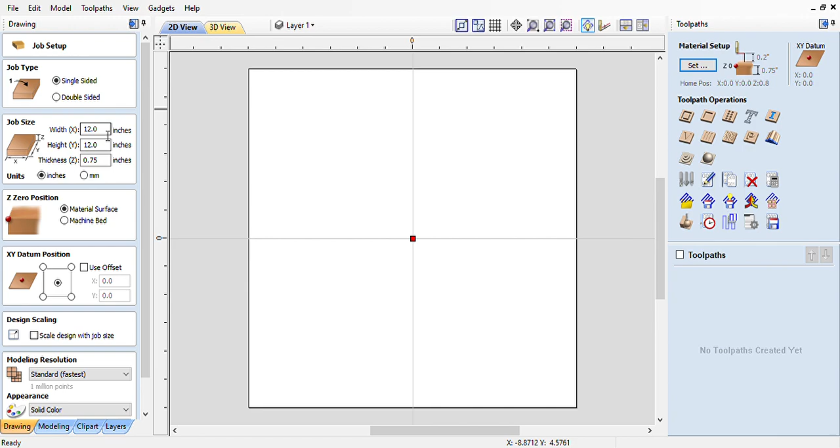The first thing is setting up the size of the clock. I'm going to use a 12-inch diameter clock, but it's up to you how big you want to make it. I probably wouldn't make it smaller, but you can make it bigger if you want. So I have to make it 12 by 12 to get that 12-inch diameter. Make sure the origin is the middle and hit OK.

The hardest part of this in your mind should be, how am I going to make sure all the numbers are evenly spaced? It's basically impossible to do that by hand, so we're going to use some features of VCarve.

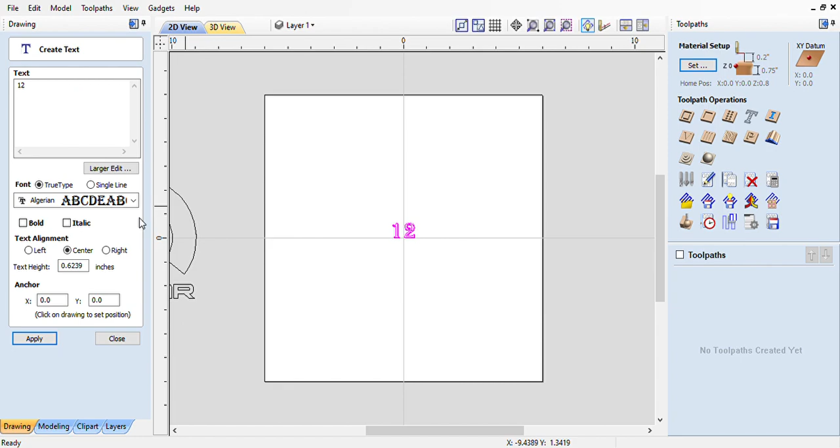First, we have to make our first initial number, which is going to be the 12. So I put in the 12, and you can pick out what type of font you want. I don't really care, so I'm just going to make my 12. You want to set this to whatever size you want. Again, I'm going to leave it because it's a sample. I'm not too attached to it.

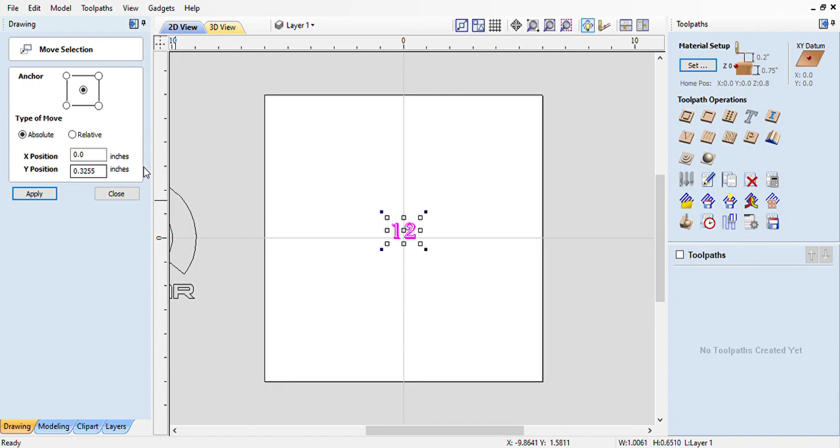It's really important that the 12 is exactly centered. A little trick to do that is click the Move tool, make sure it's in absolute and that your middle is selected, and I hit my X as 0. This is going to make it perfectly centered. If I wanted it perfectly centered in the middle, I would make Y 0 also, but I want this to obviously be up top, so I'm going to move it somewhere up top to where I like it. I like it here for now.

Now I'm going to start doing my layout for the numbers. To do that, I use the circular copy tool. I click that, make sure this is in purple, so it's selected. I have to set my rotation center. I want my rotation center to be the middle of the clock because the origin is the middle, so my rotation center would be 0, 0. If your origin was the top left-hand corner or something like that, you'd have to change this. That's why we make ours the middle - it makes it easy for a lot of stuff.

The rotate copies would actually, if you look over here, make each number slanted so they all look towards the middle. I think that looks good for some clock designs, especially the Roman numerals, but I don't really like it for the plain numbers. If you want to turn that on, you can, but I'm going to leave it off because I don't care for that. Obviously, we need 12 numbers, so I keep that 12, and it's going to be a complete circle, so I keep that 360.

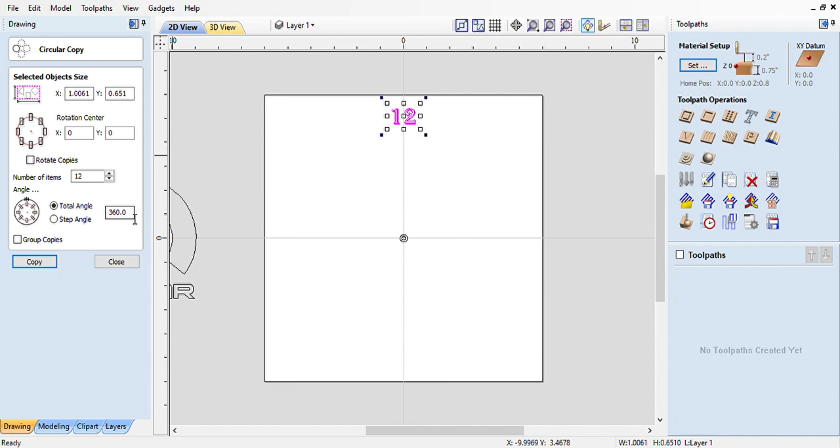Now I have all my different numbers. Make sure it's not grouped. If it's grouped, then it would lock all these together, and you wouldn't be able to edit them unless you ungroup it. So I hit close.

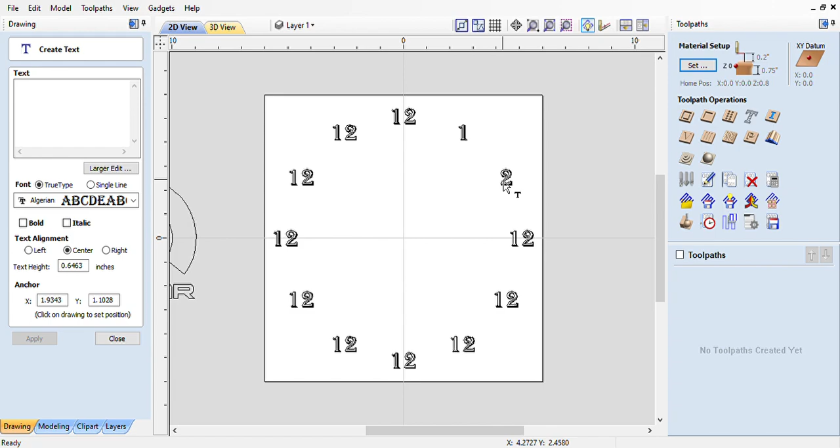Now I'm going to have to go through and change all these numbers to be the correct numbers that I really want. I'm not going to show you how to do that for all of them - you get the idea. You could also change the text, the font, if you wanted to at this point, but try to pick the correct font that you want to use in the beginning. So I'd go through and change all these, but I'm not going to do that because this is just a sample.

Your next step is going to be getting some design for the middle here that you want. You probably want some type of design, otherwise it looks really plain. So you can bring in a picture and trace it. I'm not going to show you how to do that since you already learned how to do that. This is just a traced image.

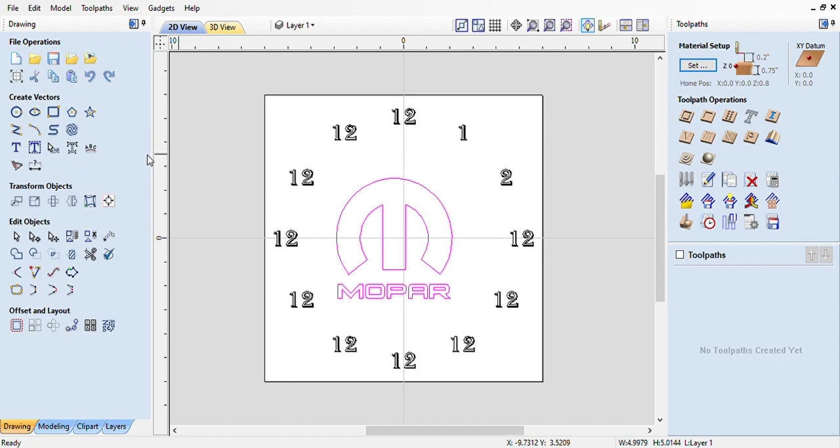I'm going to center it, so I'm going to use that Move tool again. Now it's nice and centered. I like to put a nice decorative circle to separate the logo from the numbers. I think that looks really nice, so I'm going to use the circle tool and do that.

It's optional to do this, but I really think it looks good. Your diameter is really going to be dependent on your specific design. Again, I don't care about this too much because it's a sample, so 8 inches is fine by me.

I'm also going to need a little circle here for a hole that we're going to put, because the clock mechanism has a shaft that needs to go through the wood. I don't know exactly what that shaft diameter is, and it does change based on what clock mechanism you use. So you're going to have to ask me for that and then measure it with a dial caliper. I think it's close to 0.35, so I'm going to put that in for now, but make sure you actually measure it and then put in the right diameter.

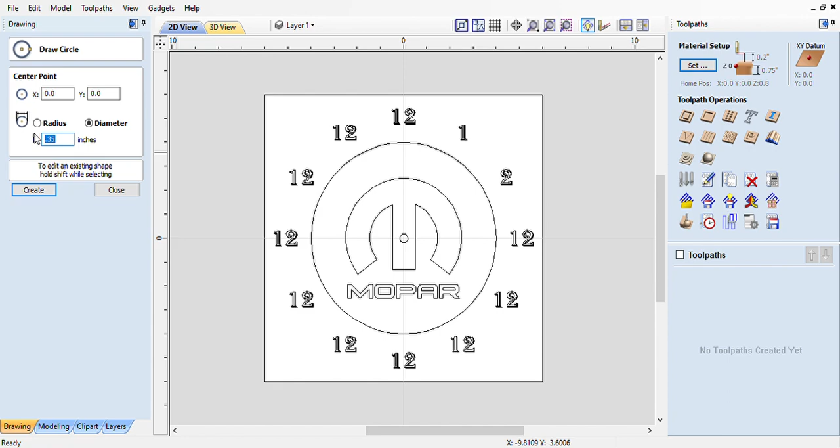Then the last thing that we're going to do is make the outline for the actual clock. Remember, I said I wanted a 12-inch diameter clock, so I'm going to put in my 12 inches, and I make that circle. Again, all this stuff could change based on what you personally want. Like this circle to me is a little too small, but I don't really care right now.

All my 2D design work is done, so I could start my 3D machining over here. When you're doing your machining, you really need to make sure you do it in the correct order. What should be machined first? You're not going to cut out the clock first, right? Because then when you're doing the rest of the machining, it's going to move all over the place and break, and it's going to be a complete mess. So you probably want to do all your engravings first.

If you're going to make all the numbers and your logo the same flat depth, you can click it all at the same time. If you want one to be deeper than the other, you're going to have to make two separate tool paths. You can only make it all the same if you're using the same tool, same cut depth, and same type of tool path.

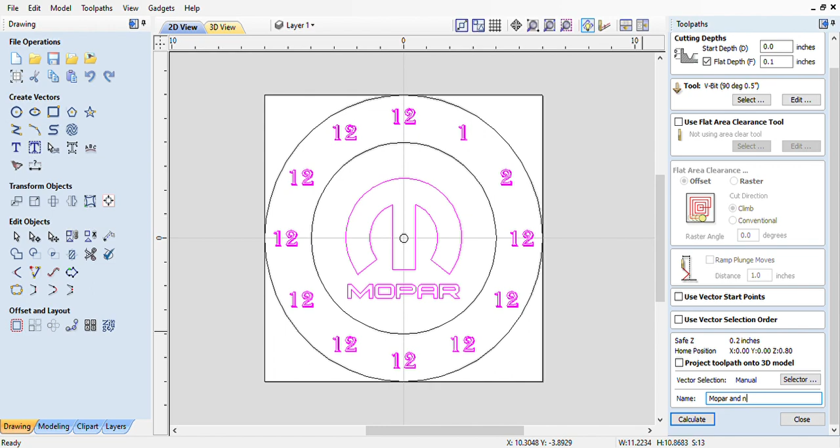For this, it's a sample, so I don't really care. I'm just going to make it the same flat depth, and I'm going to name it. It's very important that you name it, because as you start doing more complicated projects, there might be problems, and naming it makes troubleshooting way easier.

Now I want this circle to be just a little decorative thing. You might be thinking, oh, decorative Vcarve. We actually don't want to do that. If you do a Vcarve, it's probably going to make it like a pocket, which is not what I want. I want it to cut on the line, and we know that profiling will cut on the line.

So I'll click profile. I want it to be really small. I don't want it to be deep, because the deeper you go, the wider it gets. But I'm actually going to change this and set it to the V bit.

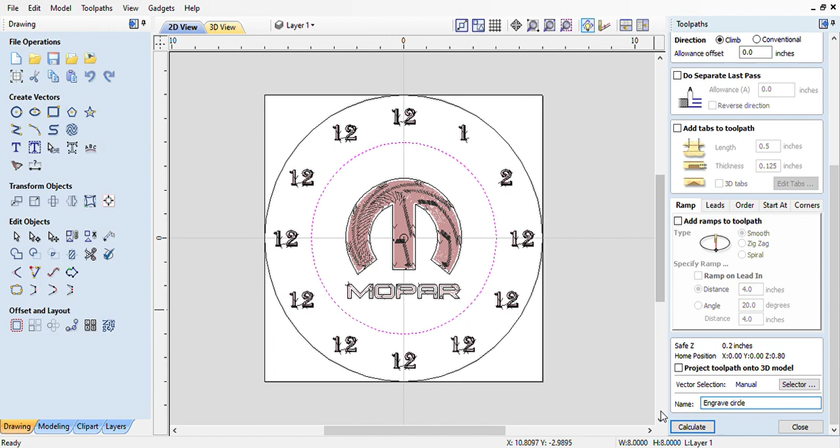And I can see how it came out. If I wanted it to be not as wide, I would change the depth so it's even shallower. I actually almost think this middle part should be a little deeper, but it's just a sample, so I'm not going to worry about it.

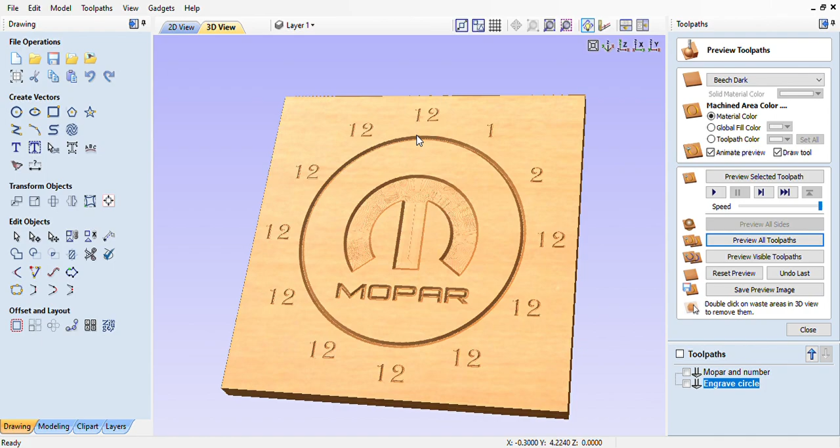Remember, all your depth changes can have an effect on how it looks. So you might have to mess around with that until you like how it looks, but for right now, this is fine.

Before I actually cut out the clock, I'm going to want to drill this. I say drill, but really I mean pocket, because in Vcarve, if you drill, it has to be the exact diameter of the tool you're using, and we don't have a tool that's 0.35 inch diameter. We only have that 1/4 inch end mill, so I have to go to pocket.

When you set your cut depth, you actually have to measure the thickness of the wood, and make it smaller than the thickness of the wood. So if my wood is 0.75 inches deep, 0.7 would be good, so I could keep that 0.7. Again, you're going to have to measure your actual wood and see what it is.

Then the last thing I want to do is cut the clock out. I'm going to do the profile for that. Again, you have to measure what your actual wood is. It's probably not going to be 0.75. You're going to have to actually measure it.

So you could design this, then make your wood, and then come back and edit your cut depth based on how big your wood turned out. Again, assuming it's 0.75, 0.7 is good.

What you're going to have to note here is that since the last tool I used was the V-bit, that's what it defaults to. It always defaults to the last tool used. But if I'm cutting it out, you never cut something out with a V-bit. You're going to want to use the end mill.

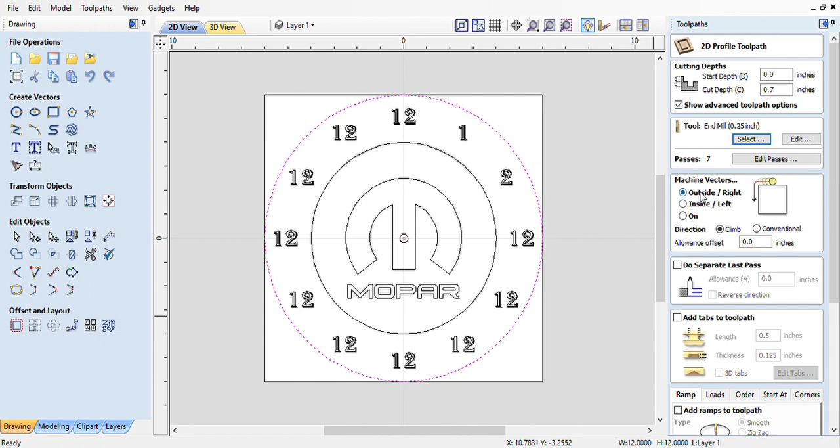All these commands will affect the overall dimensions of the clock. We're going to have a lesson talking about what this means. Inside and on the line are going to make the final product smaller. I want it to be exactly 12 inches, so I want it to be outside the line. We're going to talk a lot more about that in class.

Then I hit calculate, and I could see my clock and make sure it looks good. You're going to have to make your actual blank 1 inch bigger in every direction, so it's okay. We're cutting right up to the edge here because the blank is going to be oversized.

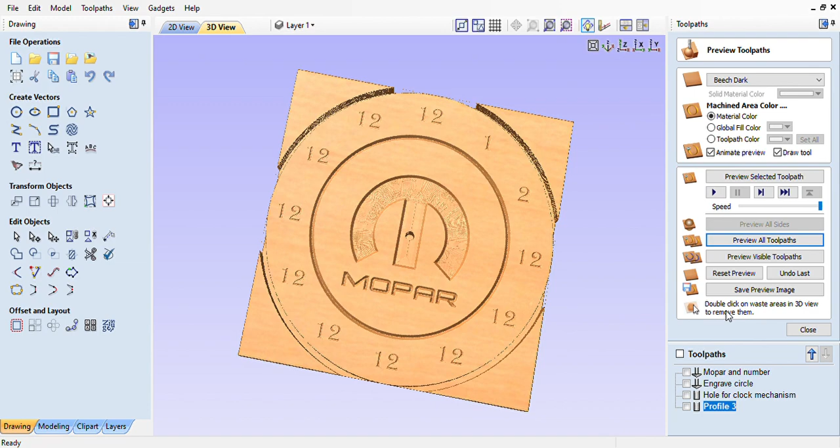Now you can save it. When you save, make sure output all visible toolpaths to one file is checked. This will allow you to click and save

multiple toolpaths to one program for the CNC. If that's not checked, you could see I have these two things checked, but it's only actually saving one. So you've got to make sure this is checked. It's a common mistake. You're not going to be able to check everything because they use two different tools. You could see there's an error.

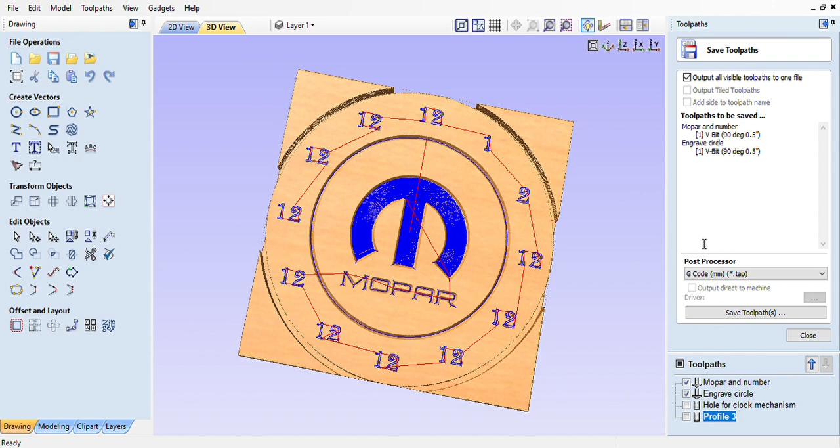So when you go to save this, after I check it, of course, and you update your cut depths based on measuring your actual wood, when you're actually ready to machine, you're only going to be able to save the two that use the same tool. So I would probably save this as JFC1, and then I would save the other two as JFC2, so I could easily know which one is which.

Make sure you also select the correct post processor. G-code MM is for the old CNC routers. I'll provide you the new post processor for our ShopSabre CNCs.